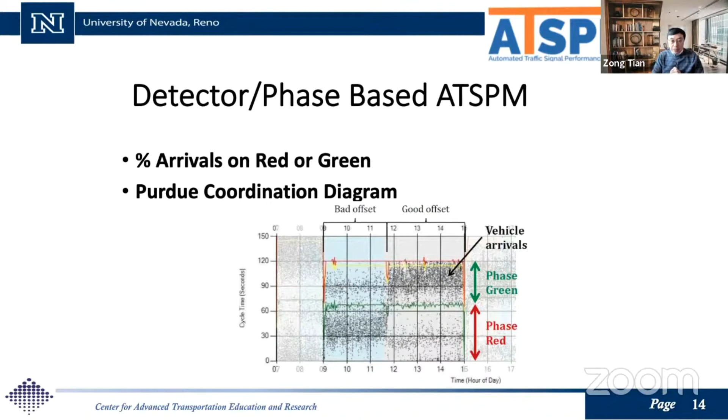But you need to recognize this is only based on one intersection approach. So how can we evaluate the entire corridor as a whole? Research has attempted to come up with a criteria. So this is one of the research. I'm not going to get into details.

Basically, you look at all the intersections, you look at the percent arrival on green, also the volume to capacity ratio. And so you give a letter grade, A, B, C, D, or F, and then you pick the worst as an indicator for the entire corridor. So this is just a research idea.

I did ask in the ITE community which agency has implemented something like this. No agency really responded. So this is something, like I said, it's just a research idea. Next, please. Next.

Now I'm going to focus on the trajectory-based, different from the event-based. So trajectory-based is really, we're talking about floating car type of travel runs. Currently, like I said, we do before-after studies. So you go there to drive, you collect the before and after travel runs, and then you report the travel time and delay.

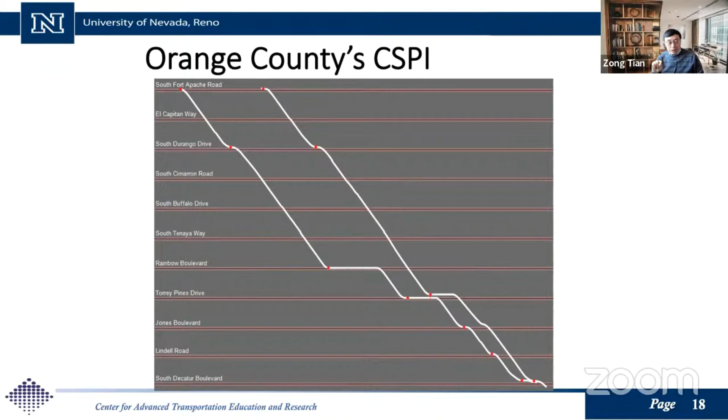Next, please. I just want to show you, these are two trajectories. And you can see this corridor has 11 intersections. Hopefully everybody can read the trajectories. You can see the slope is the speed and the stop is horizontal. If there's a horizontal line, that's a stop. The stop can be long, can be short, right?

Click. Based on these trajectories, with Orange County's methodology, it gives you a score. The one on the top, which is the line on the right, you get 92. And the other one, you get 65. So 92 is tier 1. That means trajectory number 1 is actually very good. The second one is not so good. You can tell, right? The travel time is long, number of stops is more, and the stop is also long.

Now, what's next? I'm going to talk about our enhancement. So this methodology, in general, is a good idea, but there are certain things that are missing. For example, you only know the speed, but what is the speed limit for you to achieve this speed? And the stop, yes, it's a stop, but the stop can be very long or very short. So we cannot treat a long stop and a short stop the same way, right?

So these are the sort of enhancements that we did. So next, the same trajectory, click, and this is the UNR, the research we did. Now you can see there's a speed, of course, and percent speed. That is a percent speed of the free flow speed or speed limit. Then there's a speed score, number of stops, 3, and then we convert that into standard stops, 1.7. That means the 3 stops actually are pretty short. And then percent stop, and then you come up with another score combining both.

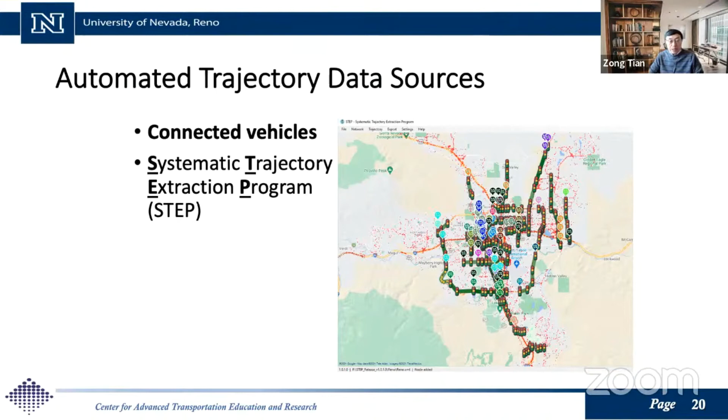So this is what we have developed. This program is called STEP, Systematic Trajectory Extraction Program. It works with the visual data. I know in the region you have visual data. Visual provides raw trip data, and this program will extract the trajectories based on the corridor you define, and also the time period you define, AM, midday, PM. Next, please.

This is just one example to show you. This is a corridor in Reno, Kietzke Lane. This is the midday, running between 10 a.m. to 12:30 p.m. And these trajectories were automatically extracted from visual data. And you can see we have the time-space diagram. After we extract these trajectories, they're going to be in the same format that you can easily import into TranSync. And you can see these trajectories aligned very well with the time-space diagram.

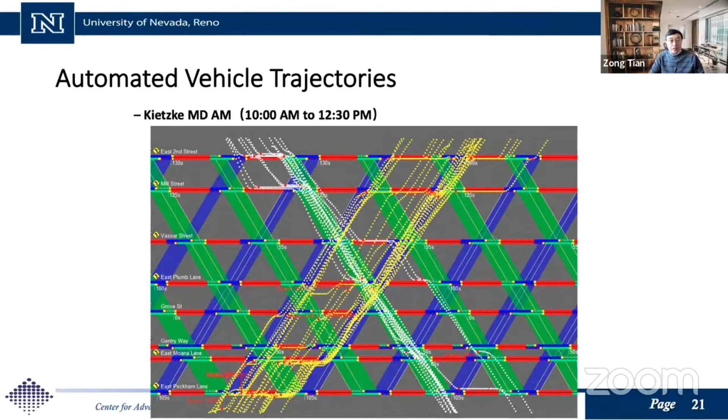So everything is very clear, why you made a stop, why you didn't make a stop. With the time-space diagram in the background and the trajectory in the front, you can clearly see what's happening. Next. Now, what is the performance based on this? First, the Orange County Performance Index. As you can see, just click, it's going to highlight the total score. The two directions, you can see 102, 106, average 103, which is way above 80. So that's excellent. The greens per red ratio, that's 5.5.

I highlight this one because this is a lot easier for you to understand. Greens per red: every stop, how many greens you passed. As a comparison, Orange County, California, they do this kind of performance report every 2 years. In their region, on average, this number, greens per red, is about 2. So 2, in my opinion, is not a very good performance. I just want to have a sense to compare with their numbers to see where we are. So that's the Orange County's performance index. Next.

And click again. Yeah. So here, this is UNR's. As I said, the score is based on a 100 scale now. You can see on average, both directions, we got 91, which is A minus. And then northbound is 89, that's B plus. Southbound is 94, that's A. Okay. At the beginning, you also see the number of trajectories, total of 43, northbound 29, southbound 14. So this is based on, I think, 2 weeks of data for this particular corridor. Next, please.

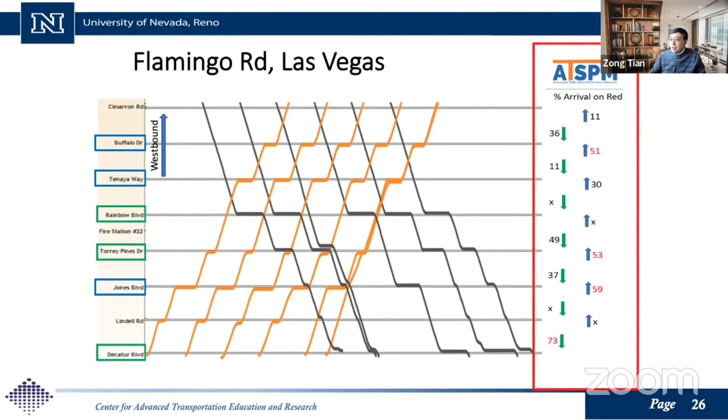So why is that? By just looking at the trajectory or the percent arrival on red, it's really hard to tell why. So next. Once you put the time space diagram, here is the time space diagram of the timing plan, you can see the reason. Just click.

When you click this, you see those white arrows, indicating departure from the upstream. The upstream green starts and the platoon starts to depart. And when they arrive at the next signal, they all hit red, right? That's why you see a higher percent arrival on red.

However, if we look at the one I just mentioned, Tenaya Way, 30%, you look at the upstream when the green starts, and by the time they get to the downstream, the platoon actually arrives when the downstream is already green. So that's why it's reporting lower percent arrival on red. Next.

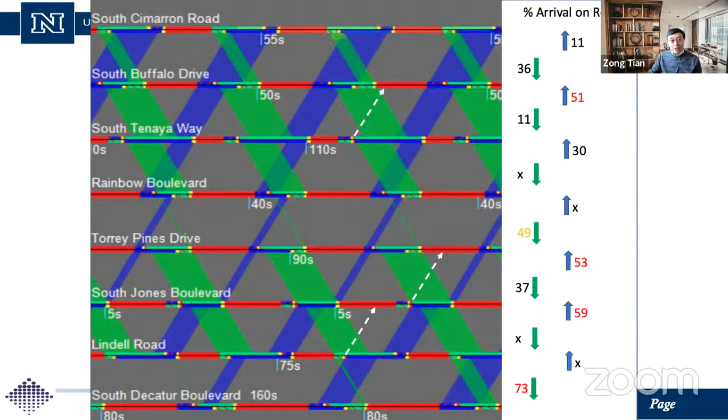But if you pull out the time space diagram, the timing and the trajectory, then you can clearly see why every vehicle stopped, because we started from upstream, Decatur Boulevard, the first signal. By the time we reached Tenaya Way, we were out of the band. So that's the reason we hit red there.

So what I want to indicate is that most of the time, from the trajectory and the time space diagram, you can pretty much see why the timing plan is a good one or not so good one, and where you should expect higher percent arrival on red. But just the trajectory without the time space diagram, or the percent arrival on red alone, will not give you a full picture of what's happening. Next, please.

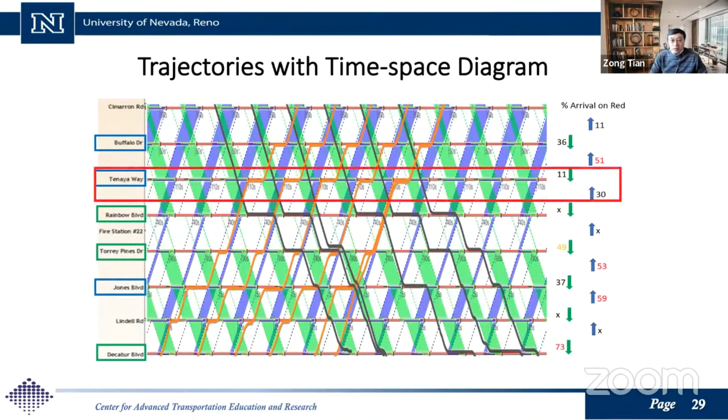Just click. So here is a short video, for those who have never seen how TranSync works. You can play the video. You can see we departed from upstream, going through this signal, that's fine, when it's still green; green means look at the blue color. Now we are out of the band. This vehicle is out of the band, and the next signal is about to turn yellow and it's going to hit red.

So I'm really glad to hear that the region is going to adopt TranSync for signal timing project. So this kind of trajectory plus video really gave you a confirmation of what's happening with the signal timing. Next, please.

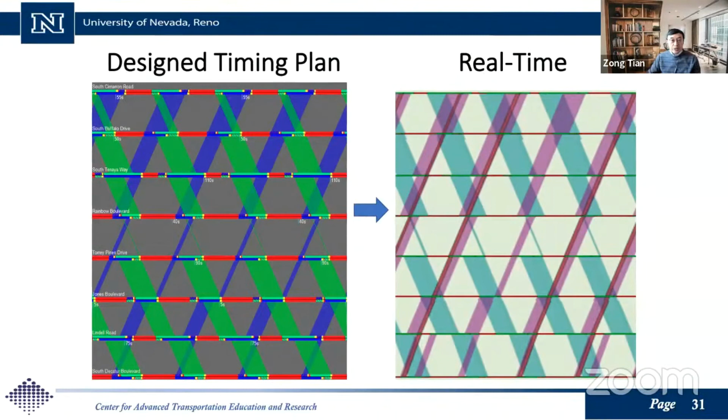Yeah, this is just to show the timing plan versus real time. The real-time time-space diagram I got from their central system. Next. It's pretty consistent, both. And then this is for the PM peak. So I looked at the PM peak and also got the percent arrival on red. Next.

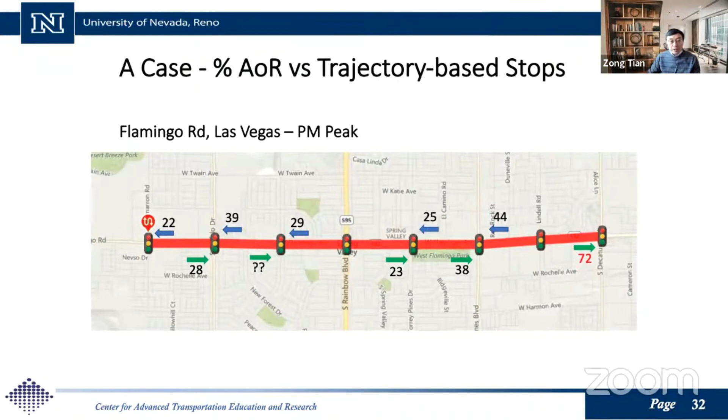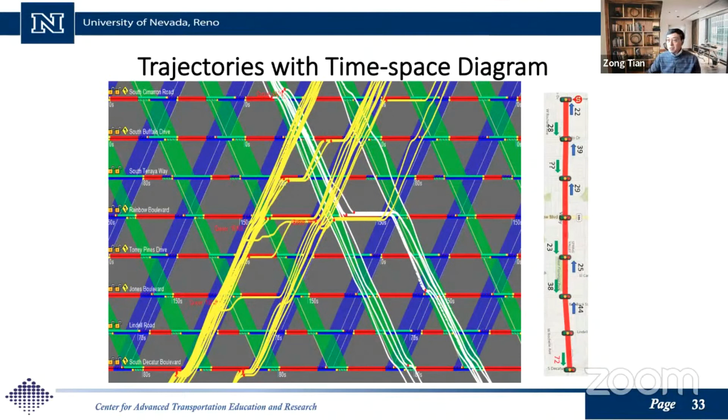A quick summary. Okay, hopefully I'm still within the time limit. So in this presentation, I talked about the two types of ATSPM, detector event-based versus trajectory-based. So both can be automatic. Click.

And currently, as I mentioned earlier, there's really no widely accepted performance measure available yet for evaluating corridor-level signal timing. Yeah, we do have before-after, but before-after, as I mentioned, doesn't give you an indication of what level the quality of the timing is. So that is something really missing in the current practice. Click.

I mentioned, percent arrival on red alone or vehicle trajectories alone is not enough. You really need a trajectory, at least with the time-space diagram. Arrival on red will give you another indication to confirm what's happening with the signal timing. Last.

Now, this is the one thing I do want to emphasize. Because we have been emphasizing performance measures for so many years, never forget our ultimate goal is to eventually improve the system operations. It's not that you just get measures without knowing how to really apply them, how to improve the signal system. Okay, so never forget our ultimate goal as an engineer is to improve.